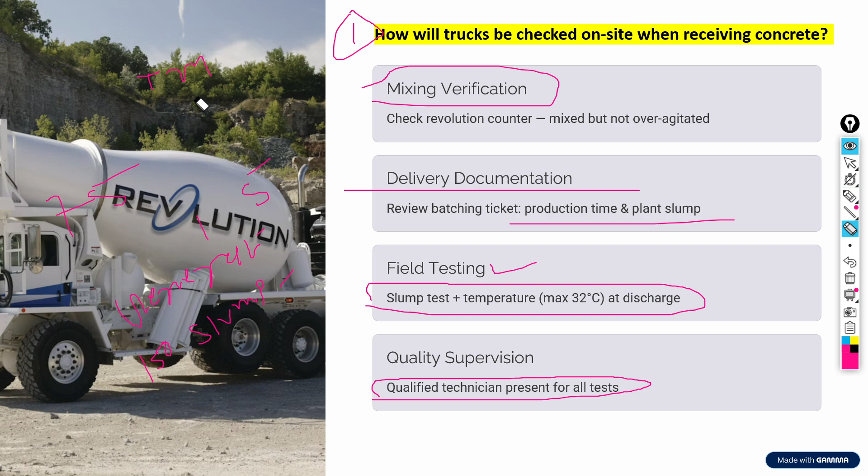This is the standard, so the interviewer can ask you what slump is usable for us, and you can say that we normally use 75 to 125. Now let's go to the next slide.

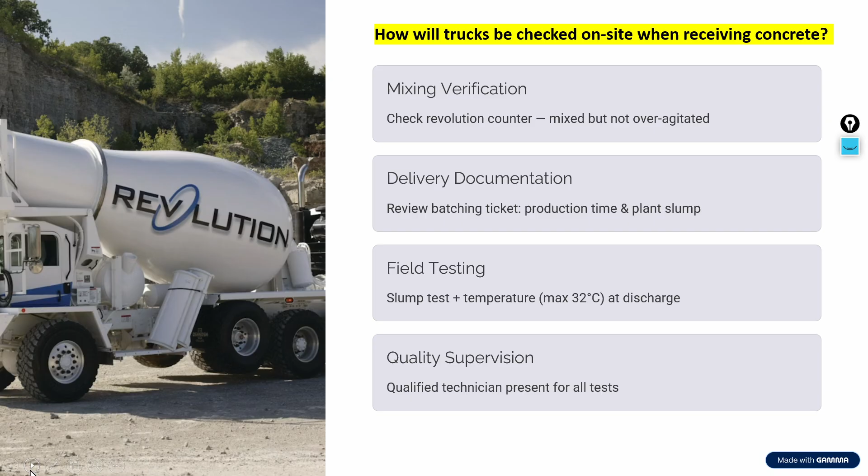What is the purpose of the slump test? The slump test uses what is called a frustum. Its name is frustum. The height is 300, the bottom diameter is 200, and the top diameter is 100. What is the purpose of this frustum test?

I notice that my video length is increasing. Why? Because I try to explain each and everything in a very simple way, and I want to cover all the things together, that's the reason.

The interviewer can ask you what is the height of the slump cone, or frustum, as it's properly called. The frustum height is 300, the top diameter is 100, and the bottom diameter is 200. The interviewer may ask you this, so you have to answer it.

So the purpose of the slump test is to determine the consistency and workability of the concrete mix and to check for the required slump. You have to remember this, or you can simply say a slump test is required to check concrete consistency and workability.

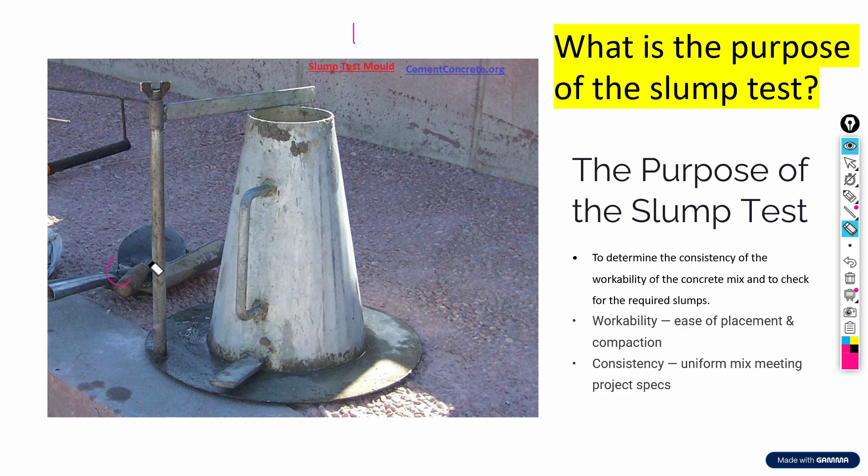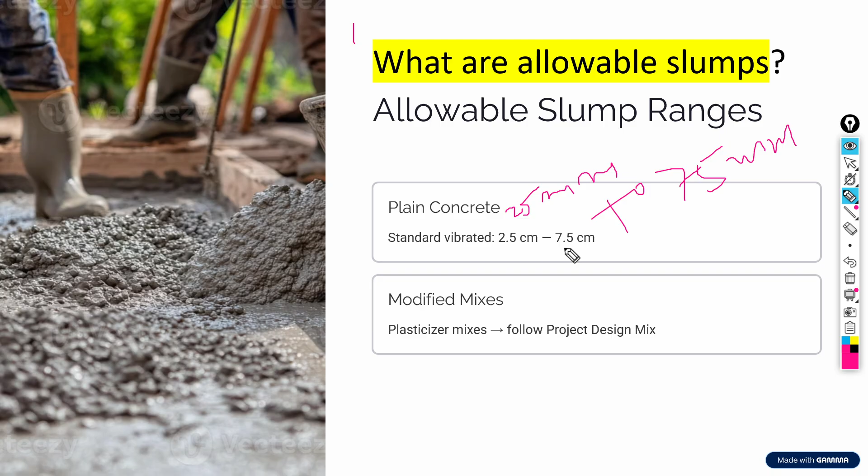Okay, so you can say this word only. Okay, so let's go to the second question. The second question is: what are allowable slumps? Allowable slump range is 25 mm to 75 mm. You can say it in centimeters also: 2.5 centimeter to 7.5 centimeter. Okay.

Then, what is plasticizer? Plasticizer is one of the chemicals. It is used in the design mix. If we use concrete grade more than M25, that concrete is made as per the design mix. Okay, so you have to remember.

Mostly we use M25 concrete in construction. Suppose in construction like a dam, in that structure we use a grade more than 25. So that goes in the design mix. While we do the design mix, we use this plasticizer. Normally we will not use it. So what is the goal of this? Increase workability at a low water cement ratio.

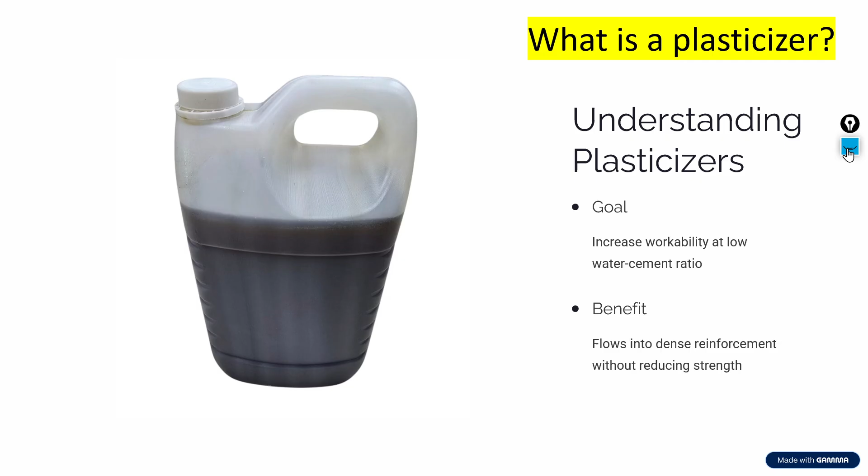So the benefit: flow into dense reinforcement without reducing the strength. So you can remember. The interviewer may ask you what is the plasticizer. If you are working on a local building, just a very small structure, there is no use of the plasticizer. People may not be aware of what a plasticizer is, but you work with the company, and the company works on very big, heavy structures. In that we use design mix concrete, and for designing the concrete mix, we use the plasticizer.

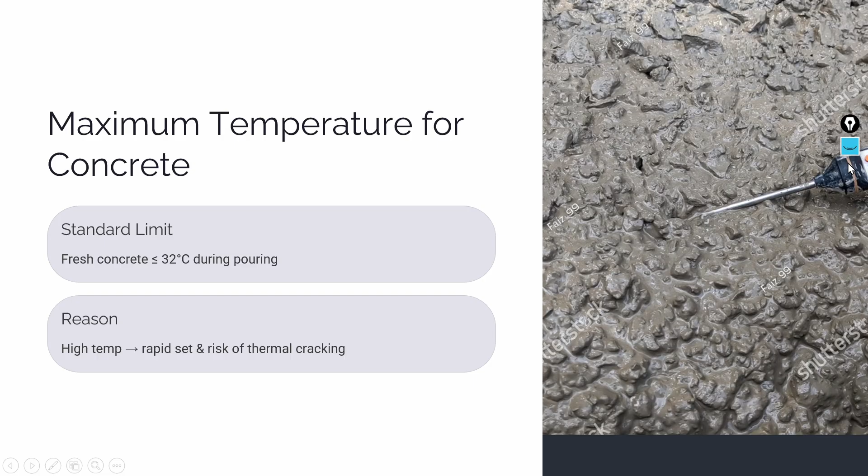Okay, so let's go to another. Maximum temperature for the concrete. The maximum temperature should not be more than 32 Celsius. You have to remember, whether you act as an inspector, consultant, site engineer, or QA/QC engineer, it is very important. The concrete temperature should not be more than 32. Why? What can be the reason? If the concrete is more than 32 Celsius and I use that concrete for casting, what can be the issue? You can see here the reason: rapid set and risk of thermal cracking.

Thermal cracking, you know, that hair cracking, the small cracks coming on the slab. If I cast the concrete in very hot temperature, hair cracks develop. And if the concrete temperature is very high, more than 32 Celsius, that is also a cause for thermal cracks or hair cracks. That's the reason concrete temperature should not be more than 32 Celsius. If concrete comes to your site and the temperature is more than 32 Celsius, you can return that TM. You have the power for that.

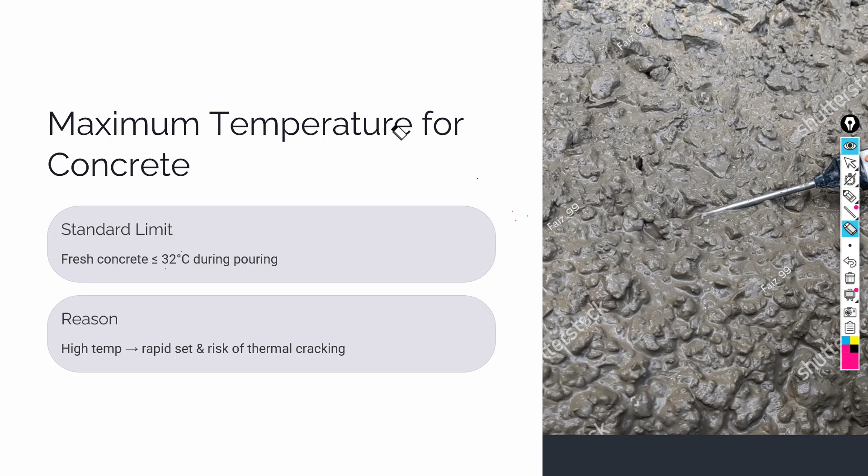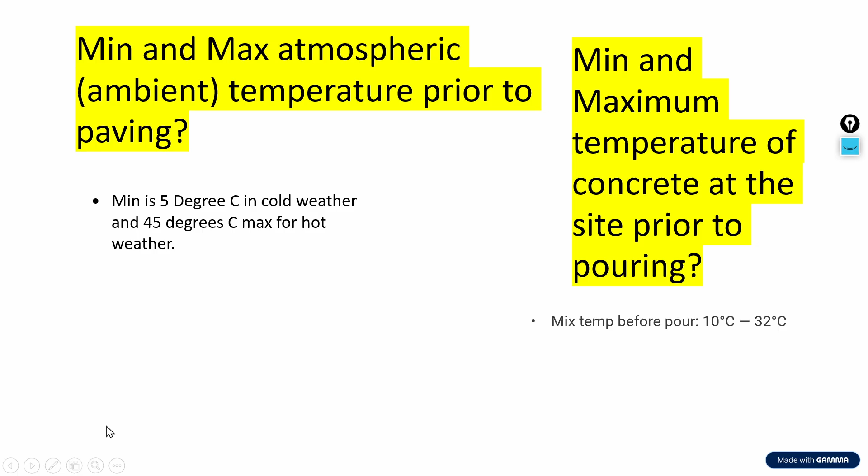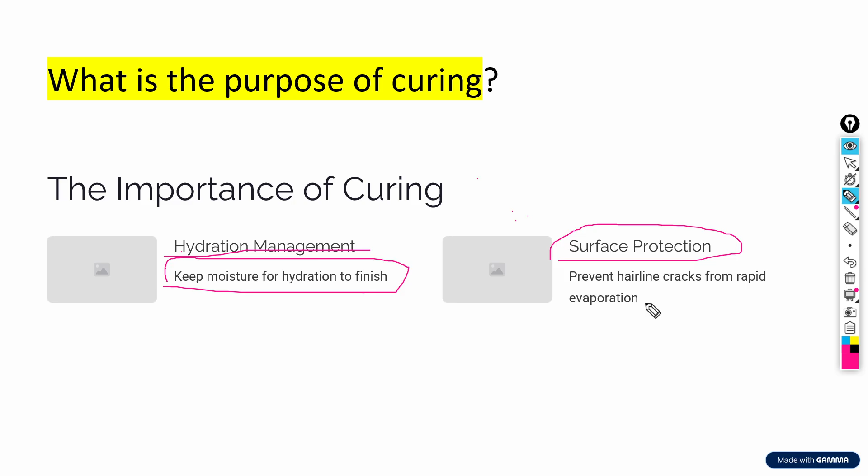So, surface and surface protection. If the weather temperature is too high and you keep curing continuously, the sunlight cannot touch the surface of the concrete, so it prevents hairline cracks, right? So that's why we use curing.

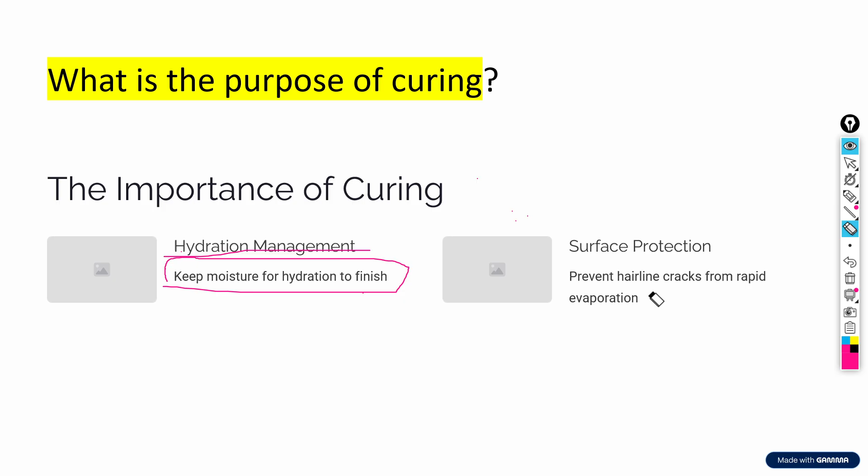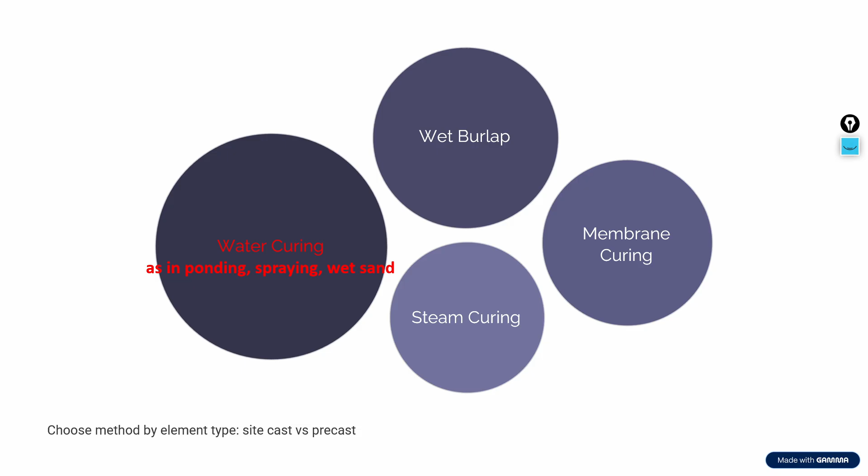Then choose the method by element type, site cast versus precast. Mostly on site we use water curing, as in ponding, spraying, wet sand. How? Ponding means, this is the slab. We'll do a little temporary concrete casting, or we'll do brick work, at least one layer, and put the water on the slab. This is called ponding.

And in some cases we will not keep water a long time on the slab, so we just spray on the slab. We will not do the brick works or block works here. We just spray, sprinkle the water on the slab. So this is also a method to do the curing. Then third is wet sand. Wet sand generally is not used. Mostly we do the ponding and spraying.

For wet sand, we just lay down the sand, 10 mm thick, on that, and then we'll put the water on it. So actually wet sand is not used in most cases, but this is also an option.

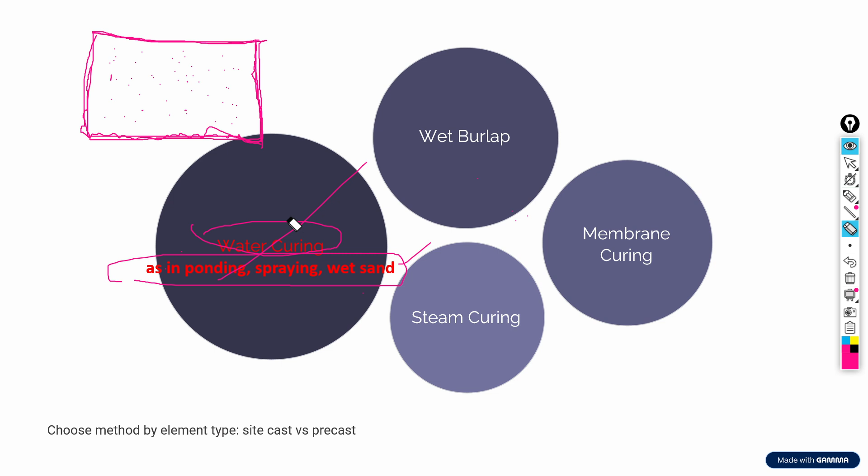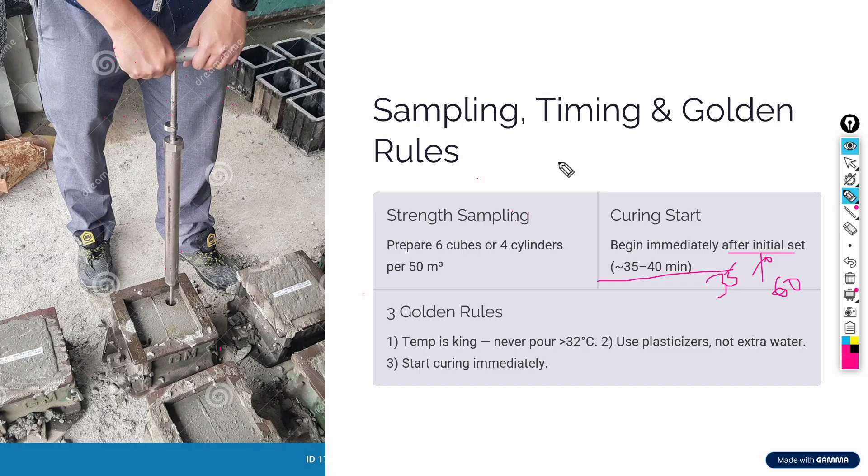Curing start. The interviewer may ask you when we can start the curing. You can say, sir, the concrete initial setting time is 35 to 45 minutes; it can go up to 1 hour. So you can say, sir, 35 to 60 is the initial setting. Once the concrete starts forming strength, after 35 to 40 minutes, we can start curing. But the curing method is spraying the water, because we cannot put pond water, you cannot put much water. You have to just sprinkle it. So after 30 to 45 minutes or 1 hour, we can start the curing.

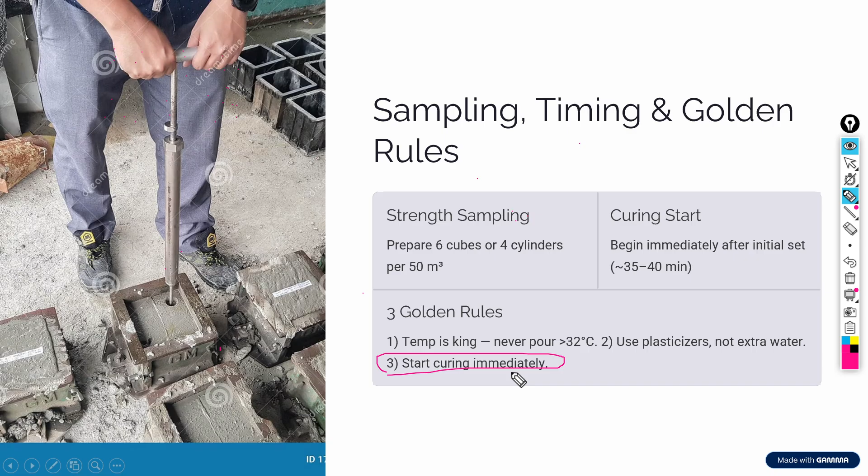Just the golden rule, you can see here: temperature should not be more than 32 Celsius. Use plasticizers but not extra water. Start curing immediately. Immediate means after the initial setting.